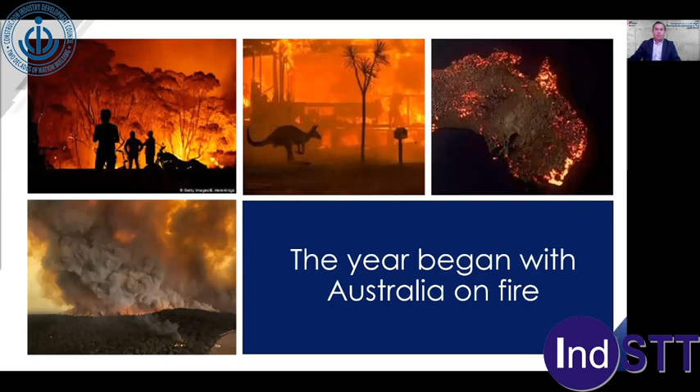We started a very complicated year, 2020, where Australia was on fire, thousands and thousands of land areas on fire. Then the COVID virus began to spread in a fact without precedent in the modern era, one that all of us who are alive have not had to live through before.

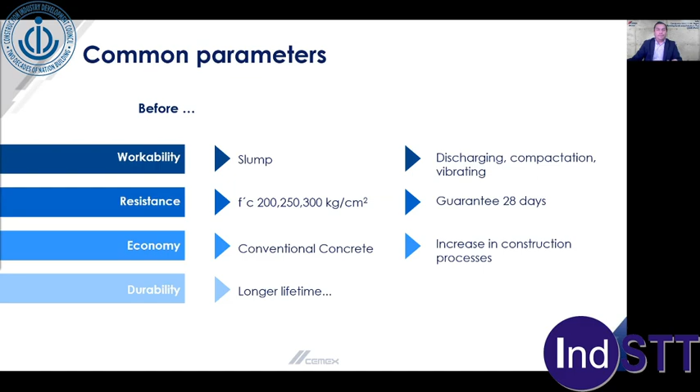Generally, works always take longer than programmed. The projects are different, and in the course of time there are always mishaps not visualized from their specification, resulting in an expense greater than budgeted.

If we think about this transformation and see the opportunities concrete offers us—not necessarily because it is gray, dense, and square, concrete also has the opportunity to be flexible in the face of requirements for reduced personnel, reducing construction times that can translate into shortening weeks of delay, and reducing or eliminating finishing processes accompanied by innovation in processes and materials.

As I mentioned before, the challenges are many, and these must be summarized in three words: security, always taking care of our personnel; efficiency, reaching our objectives despite the challenges; and good support and accompaniment.

For this, I want to reflect on a question. Now that our construction industry has been considered essential, what kind of products do you imagine could help us face this challenge? Well, today we will talk about self-compacting concrete, architectural concrete, ready-mix mortar, and antibacterial concrete.

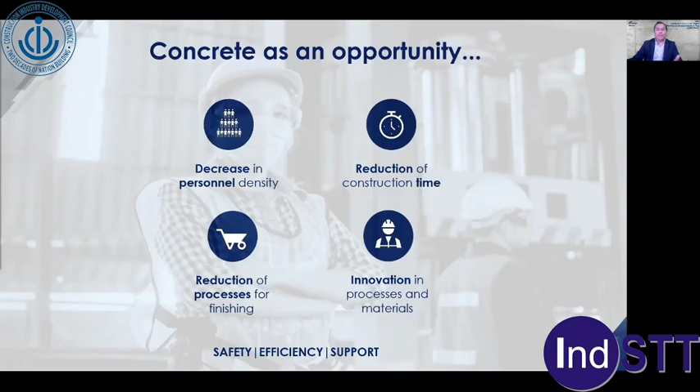These four concrete types will help us revive our industry after COVID-19. With all these opportunities we have mentioned, several options are open to lead the works forward before the challenges mentioned, as concrete, being a construction material with diverse performances, can lead us to execute in an intelligent and concise way, fulfilling the requirements of guidelines.

The first agent promoting transformation in our construction is self-compacting or self-consolidating concrete, which is a highly fluid concrete that allows partial or total replacement of vibration and contributes to making work more efficient in casting, achieving highly aesthetic finishing.

All of this helps it be placed very easily, which leads to reducing personnel dedicated to compaction or consolidation, which in turn reduces equipment needed for this activity, as well as noise and emissions. It also reduces personnel required to spread the concrete, for example in slabs and other horizontal elements, reducing placement time and leaving elements ready—slabs, columns, foundations—while also helping with leveling work and avoiding segregation.

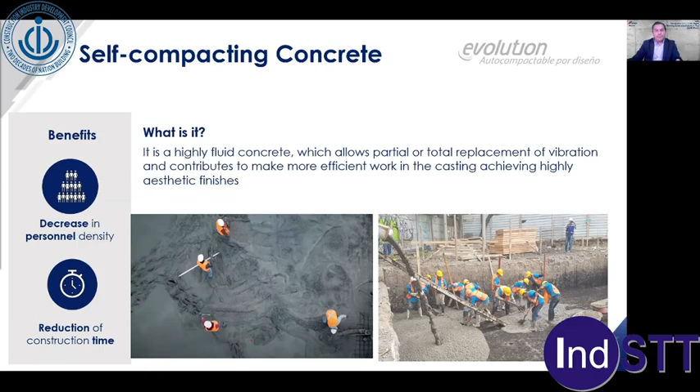All this also translates into a considerable decrease in rework due to bad finishing. How many of you have not assigned a complete crew to punching jobs, repairing recently cast elements? It reduces the casting times, so the time workers need to be on site is reduced.

All factors that self-compacting concrete can contribute translate into a reduction of up to 40% in manual labor. That is to say, a conventional crew formed by 7 workers can be reduced to 4 to deliver the same result on the same element, without even quantifying the benefits and savings in environmental impact.

Our second productivity and transformation promoter is accelerated resistance concrete, which, compared to a normal setting concrete, allows us to obtain fast resistance besides reducing execution time and, above all, putting the work into service in a few hours. It is suitable for construction systems that demand fast finishing and soon construction.

These performance qualities allow us to reduce construction times and increase project productivity, as well as adhere to the work programs which, as mentioned by the architect previously, tend to lag behind the established times. Accelerated resistance concretes allow us to obtain the specified resistance at 28 days in up to 24 hours or less.

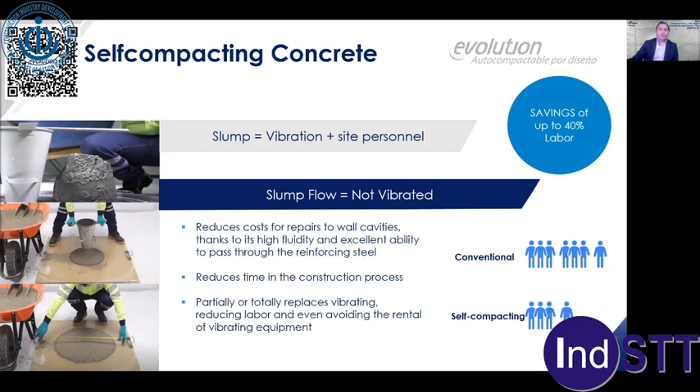Therefore, these concretes allow us to remove the forms or formwork in less time, and perhaps in the same day an element can be cast and de-formed. With all the above mentioned, it allows us to put elements and structures into service, always ensuring compliance with quality and resistance standards, generating savings of up to 70% in construction time.

What benefits does architectural concrete offer us? The main objective of architectural concrete is the reduction in finishing processes, since it is a product that, in addition to complying with structural properties, has the capacity to have the highest aesthetic quality.

This is achieved with a correct mix design by means of integral colors, aggregates, and cement, leaving as a fundamental characteristic the image, the form, and the texture in a single material, the concrete.

Architectural concrete is competitive with other traditional materials. We can get more durability, savings in maintenance cost, and most importantly, a reduction in finishing time of up to 25%.

In the case of using architectural concrete, it is important to mention that we must take certain care before making a cast. Some recommendations are a proper selection of formwork, mold release, and having very clear what type of texture and finishing we want to achieve. Make a mock-up before the official supply in order to assess its appearance and also familiarize with the construction process.

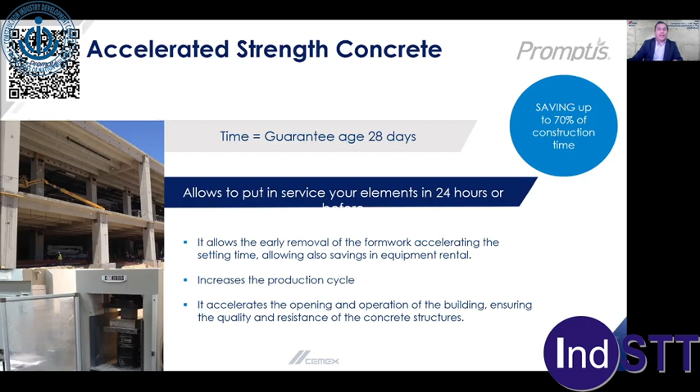Architectural concrete replaces paint, eliminating painting and repairing processes, reducing construction time, since finishing stages are one of the longest construction processes due to the detail in the work. The times and work of aesthetic repairs are smaller, being a product with uniformity in appearance and savings in maintenance cost.

Without requiring additional constructive processes, as is the case of architectural concrete, as a result we get a lower initial investment and the savings that could be generated by using integrated color into a concrete wall. In addition, we add the benefit of maintaining speed of construction, among others.

Stabilized mortar, or ready-mix mortar, maintains workability properties for periods of 4, 5, and 8 hours. The traditional comparison is against mortar made on site. Imagine your project site where the mixer truck arrives and discharges the mortar in a couple of containers, and the builders just have to carry the mortar and start placing it. This makes it clear that you are reducing site personnel and storage space for material on site. It's recommended for masonry works and can be supplied in different resistances and slumps.

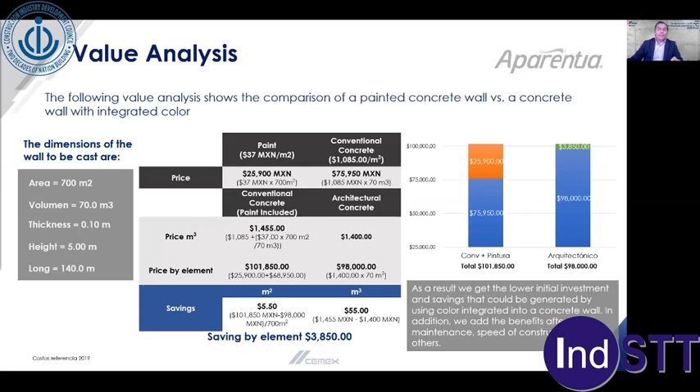We can make any elements we can imagine with this product. So the ready-mix or stabilized mortar competes against mortar made on site. It decreases labor density per element because the product is pre-mixed from the ground up, ready for placement, with no need to add anything on site. It reduces on-site storage costs of material because it's pre-mixed, and reduces rework for repairs caused by quality or performance problems when mortar is made on site.

The last concrete type is self-curing concrete. Self-curing concrete's main function is to promote internal curing, making the hydration of cement more efficient, promoting cohesion, improving workability, and facilitating the finishing of the concrete. Generally we have the normal concrete process, a conventional concrete, and a concrete curing process. Self-curing concrete promotes that internal curing by itself.

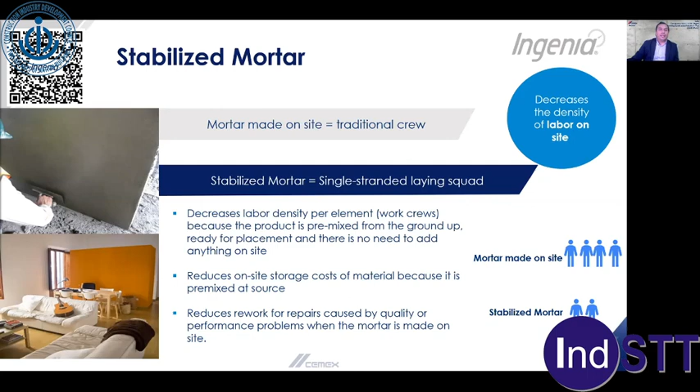Antibacterial concrete has antimicrobial characteristics, which in addition to developing its mechanical properties, can slow and inhibit the growth of bacteria on the surface and inside the concrete elements.

Antibacterial concrete fosters health and sustainability, reducing the need for protective coverings and disinfection processes during or after construction, which reduces time in the construction program. It reduces the disinfection process for more than 10 years for a wide range of bacteria.

As we've said, given the situation construction finds itself in regarding its evolution over time, one of the greatest opportunities is to innovate. Innovation and its incorporation into our projects will ensure we can meet and overcome the challenges we all face today. It's necessary to enter the digital world, which will allow us to be more efficient and increase productivity. We should make use of tools that connect us with our customers, suppliers, and our own equipment—tools that facilitate information management and help us make better decisions, like placing orders online with a click.

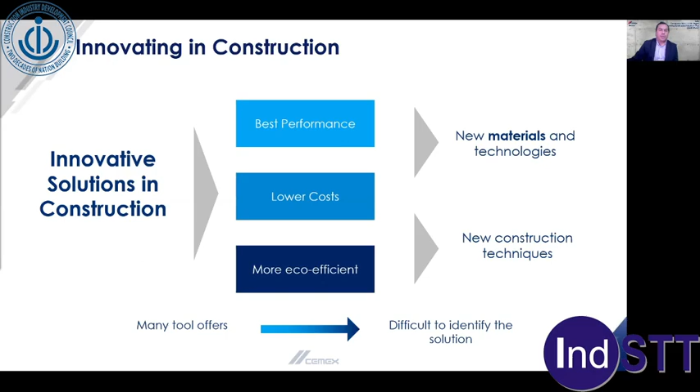Construction has the advantage of learning from other industries that have gone through similar digital transformation processes in the last 5 years. Experience shows that companies fastest to assimilate emerging technologies and develop new platforms are the first to move and gain a strong competitive advantage. We expect construction to follow a similar pattern, presenting all industry participants with the imperative of launching an immediate transformation. Technological stagnation in construction has led to low productivity and failure to incorporate digital technology in our projects.

However, it's time to start using tools that lead us to innovate in construction, not only in materials but also in project site management. For example, if airports have implemented artificial intelligence to detect suspicious cases or positive COVID cases, why not use the same technologies at health checkpoints on our project sites?

Using big data to monitor worker efficiency and detect possible infections, or having sensors and telemetry to monitor proper implementation of prevention protocols. And also begin to visualize construction processes that, hand in hand with materials, take us to another level of construction.

Robots to automate the placement and assembly of steel, the placement of block partitions, concrete launched with shotcrete via drones, modular prefabricated precast structures not only to assemble buildings—as seen in hospital construction during this pandemic—3D printing of concrete houses and buildings, use of BIM 7D, and technologies that incorporate prevention measures from the design stage for the execution of works.

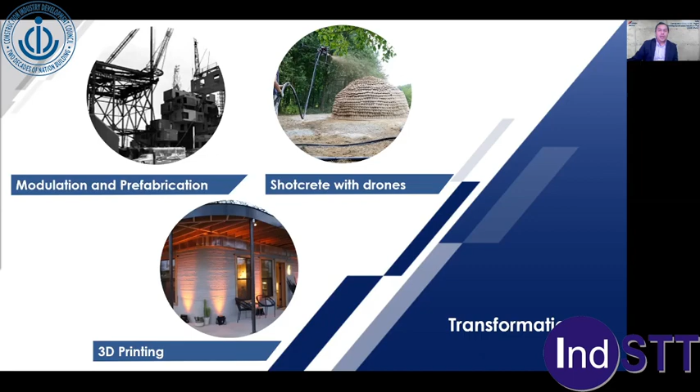Think about what we can achieve if we change the way we see concrete. Think of concrete as an opportunity. In summary, it can clearly help us reduce work personnel.

And to mention an example, it can be applied to the fluidity or stabilization characteristic of a product. We can think about accelerating the resistance even in hours and not wait for a period of 28 days. The reality is that almost 80 days of confinement have shown us that the future and innovation is now.

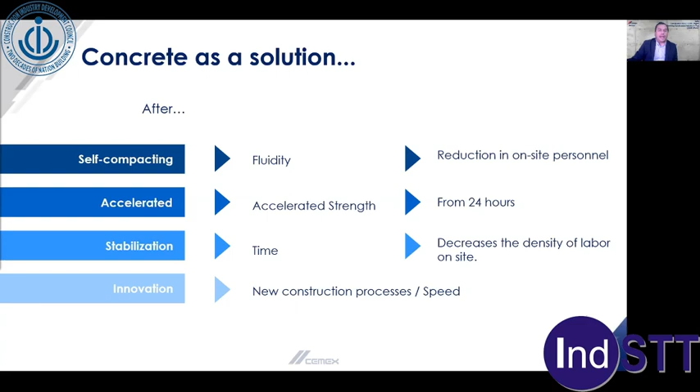So I'm going to close my presentation with a quote: every crisis has a solution, an expiration date, and a learning. Thank you so much, and I'm ready if you have any questions. Thank you so much for your attention.

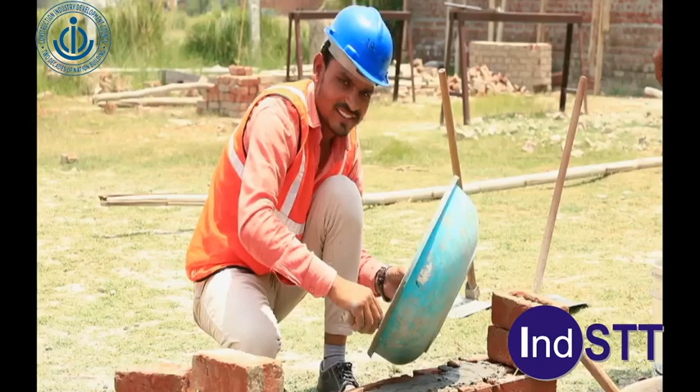Up above the world so high and down on the ground, the advancements that you see in India's aviation is the success saga of the excellence shown by Airports Authority of India. AAI is constructing, operating and maintaining world-class airports. Along with that, AAI has a side that's down to earth and close to the people.

One that's clearly visible in its CSR programs and activities. Through its CSR activities, AAI has keenly focused on skill development. To generate livelihood opportunities in backward and remote areas, AAI has tied up with the Construction Industry Development Council for skill development of unemployed youth and people belonging to economically weaker sections. In the construction industry, there is a huge shortage of skilled manpower, and at the same time there is unemployed youth, so if we provide them a skill, it will be a win-win situation for both. Through this skill development training, students get theoretical and practical knowledge in construction-related subjects like land survey, electrical wireman, general work supervisor, site accountant and storekeeper, etc.

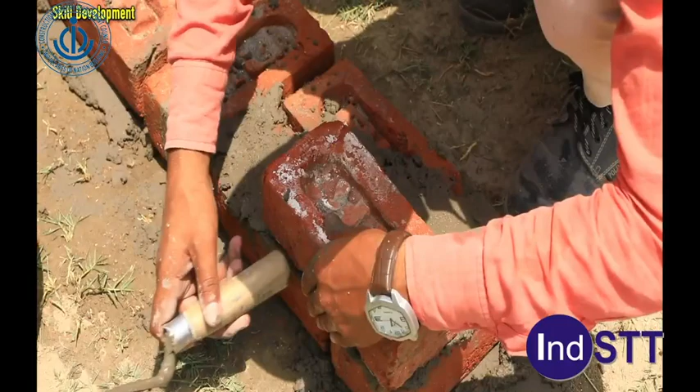Actually, here we are providing training to the unskilled youth of India who are unemployed. We distribute pamphlets at different locations in UP, Bihar, and West Bengal to find unskilled manpower, and then we make them skilled. We provide them 3 months of training. More than 5,000 students have been trained through this skill development program since 2015.

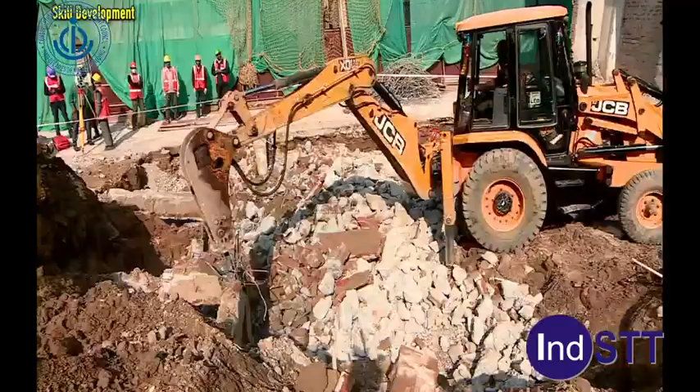AAI has generated employment for many underprivileged and uneducated youth. And on the other side, AAI and other PSUs got skilled workers for their construction sites.

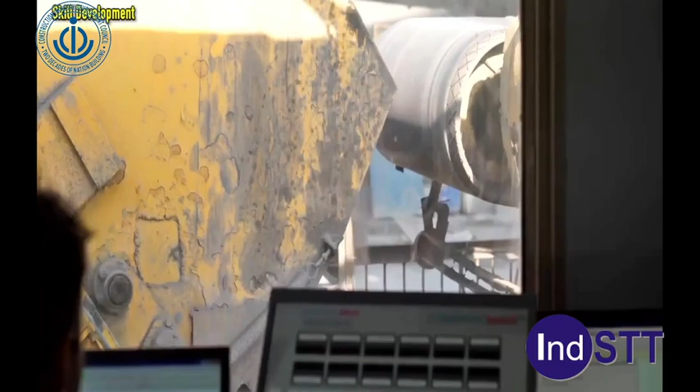Wherever you are, my name is Pedro Castro Borges.

It's a pleasure for me to participate in this online international conference on reviving the construction industry in a post-COVID world, and India Construction Week, of course. I'm going to talk with you about the social appropriation and application of corrosion and concrete knowledge in the face of pandemics and natural disasters.

Now, we are living through a very singular situation around the world, which is the pandemic. However, there are many things that are linked with the situation of poor people. We need to fight against that. We have been doing that for many years, but we have not had complete success. The idea of this presentation is to show you some of the things we have been doing in our place in Yucatan to help people achieve social appropriation of knowledge.

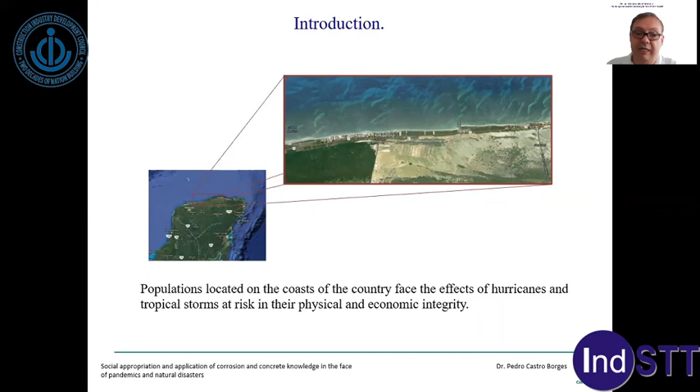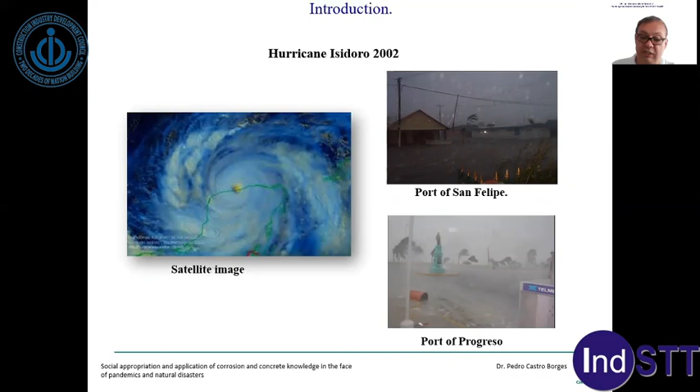The Palafite, the stilt house, the first model, the first prototype, was constructed just before the passage of Isidoro. And these are some examples of the floods in Mexico, recent floods in Yucatan and Tabasco.

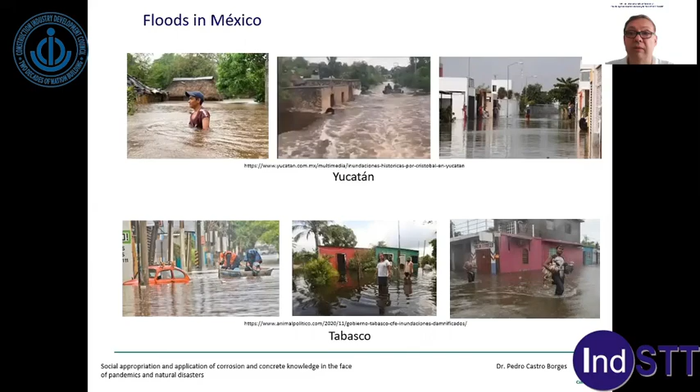If by that time the government had a strategy to construct stilt houses everywhere to minimize the economic, physical, and human impact of the floods, we could have fewer problems than now, at this moment where all the southeast of Mexico is affected by floods. Here are other recent images of the disasters.

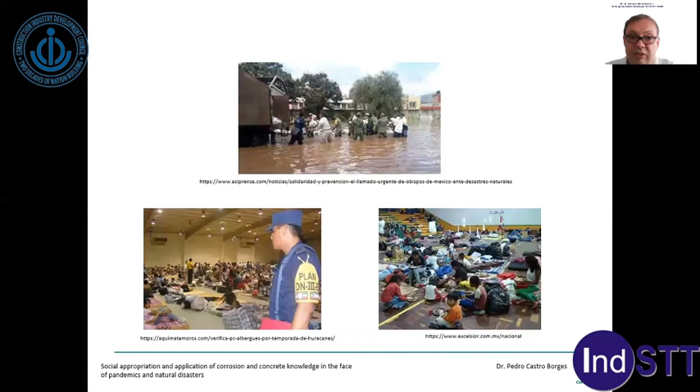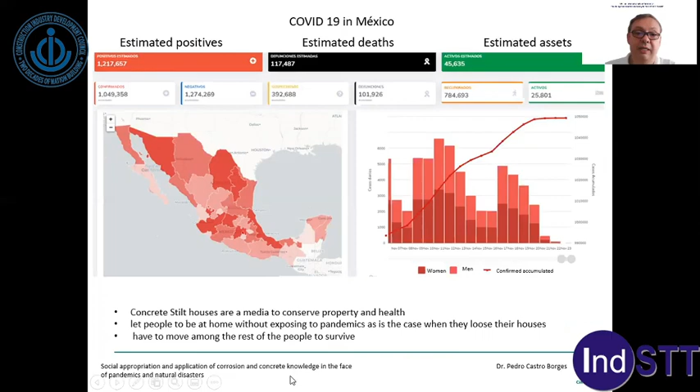And here we have the estimated data of COVID-19 in Mexico, now by November 25, 2020. Fortunately, we have the vaccines coming, but the problem here in the Southeast is terrible now.

But what was the origin of the Palafites or the stilt project? In 2002, it emerged as an idea from Cinvestav in Mérida, in conjunction with the population. The idea was to use a rural housing model, but to prepare and develop this housing model with the people, with durability and sustainability criteria, and try to adapt it to stilt housing.

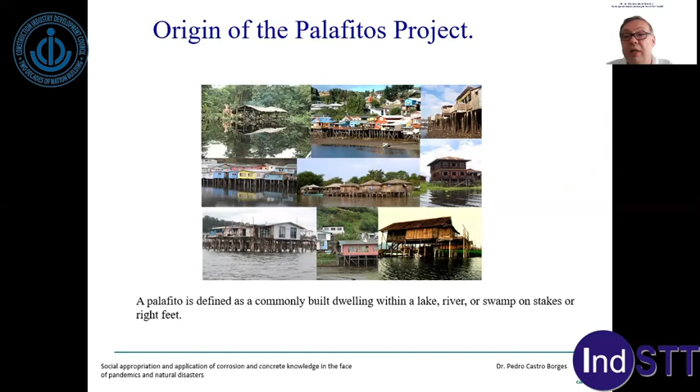These are some photographs from stilt houses in many parts of the world. A palafito is defined as a dwelling commonly built within a lake, river, or swamp on stakes or right feet. This is the first palafito, built after the passage of Hurricane Isidoro in the village of San Crisanto.

With this in mind, part of the objectives of this talk was to show you the experience of training people from developing communities to appropriate knowledge related to corrosion and concrete, even in the presence of poverty and illiteracy.

The second objective, which was very important, was to detect and record the influence of microclimates on the corrosion process of the palafito substructure, based on orientation, height, positioning of the rebar, internal temperature, and humidity of the concrete.

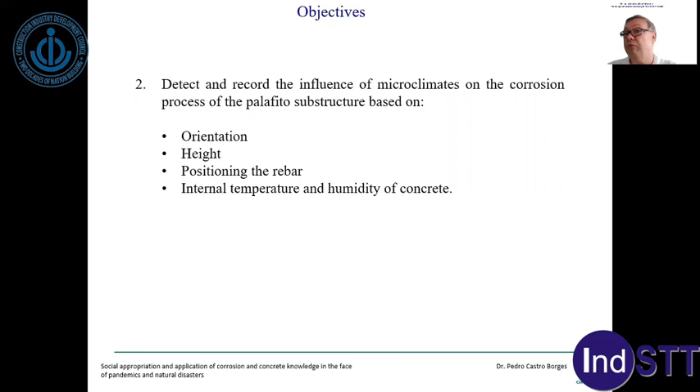I'm going to show you some of the results that were obtained with the help of the community. They were able to empirically know when their house was in danger or not, in terms of corrosion or durability. Here are the palafitos, the first models: the first with galvanized steel inside concrete, the second with black steel.

The models are quite different. Palafito 3 uses conventional steel and concrete, and from the fourth one onward we have the prefabricated option, which let us decrease the cost. Of course, the participation of the people was mainly on the roof and some other parts of the structure within the construction.

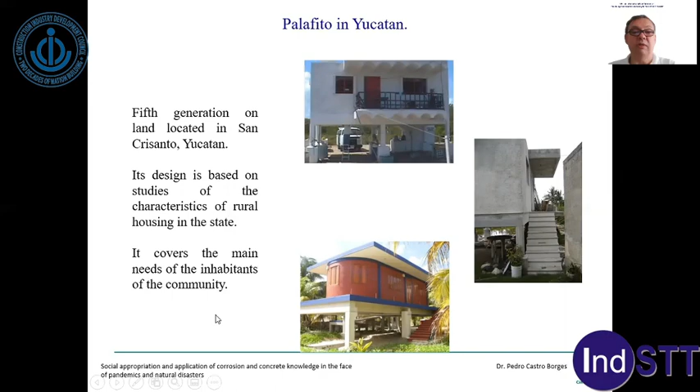The palafito's design was based on the characteristics of rural housing in the state, as you can see in this specific one, and it covers the main needs of the inhabitants of the community.

In the methodology, a basic description of this design was the reinforced concrete substructure, which was the base for our study on durability, because the substructure sustained the structure and was confronted with the tides, high tides, floods, and now with the pandemic situation.

So the families could stay at their home, safe, without risks, with their properties, their human lives, and protected from the pandemic. The elements that make it up were prefabricated, and the design included moisture chambers.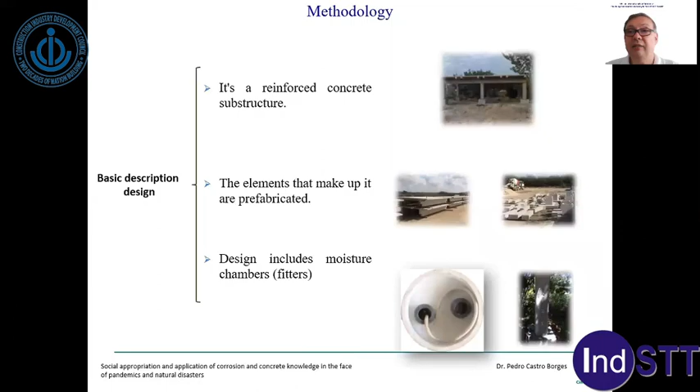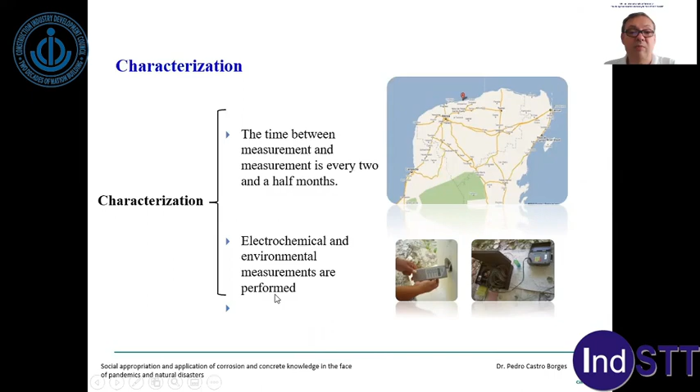These moisture chambers were designed to obtain temperature and relative humidity data, as well as electrochemical data. In the characterizations, we tried to measure every 2.5 or 3 months, using electrochemical and environmental measurements, in several study areas in the columns and beams.

In these columns and beams, we selected 3 positions and obtained results from them and also from the rows. We have several nomenclatures. We are going to talk in this conference about some specific contributions of this study.

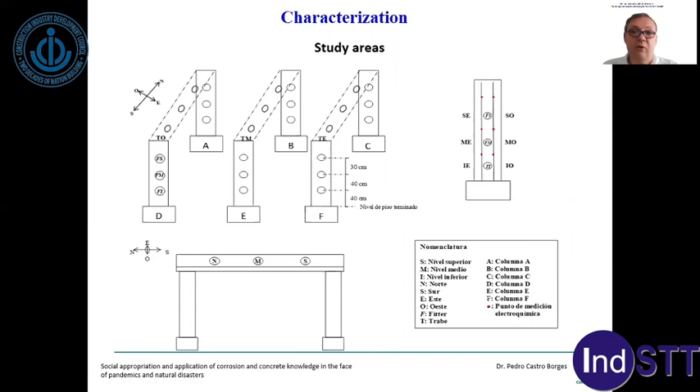These were the measurements, the apparatus used to measure temperature and relative humidity. And this is the commercial corrosimeter, the GECOR6, used to measure with the chambers and with the help of the community, to obtain values of resistivity, corrosion rate, corrosion potential, and so on.

Now we have the results. I'm going to show you the result carefully. This is the only slide of results, and then we are going to go to the discussion.

I'm going to show you only the corrosion rate values. These corrosion rate values are in accordance with the others: humidity, temperature, corrosion potential, resistivity, and so on.

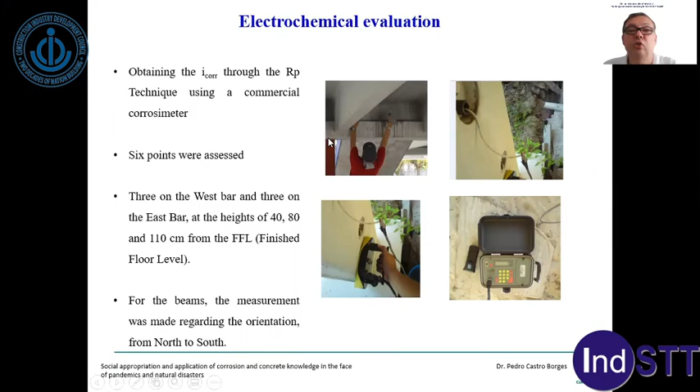There are 3 important things here on the corrosion rate that I'd like to show you. The first one is to note that there is a mixture of all the variables, so it is impossible to know the contribution of each of them if we are talking about the orientation, because the orientation gives us the possibility to change some design variables on the palafite, making it more accessible, more economic, and more durable to the community. So that was very important to us.

The second thing to observe here is that all the tendencies are flat. And that was very important, because the third thing was to note the dotted lines, specifically the red dotted line, which means the threshold between the passivated and the depassivated zones. In this case, all of the values were below the depassivation zone.

So we were not at risk of having corrosion, and the behavior of the structure was as we were expecting. That made us feel very happy, very, very happy until now. So the durability design was working. So what is the problem now?

To have the contributions - it is not possible with this representation, so we had to change. Now we are going to discuss the results in terms of the cumulative corrosion rate, which is going to show you the influence of orientation, the main parameter we are going to analyze today. The corrosion rates are in microamperes per square centimeter per month.

Let's observe here. We are going to analyze the heights in columns: the top, the average, and the lower height. The top height at 110 centimeters from the baseline, the average height at 80 centimeters from the baseline, and the lower height at 40 centimeters from the baseline.

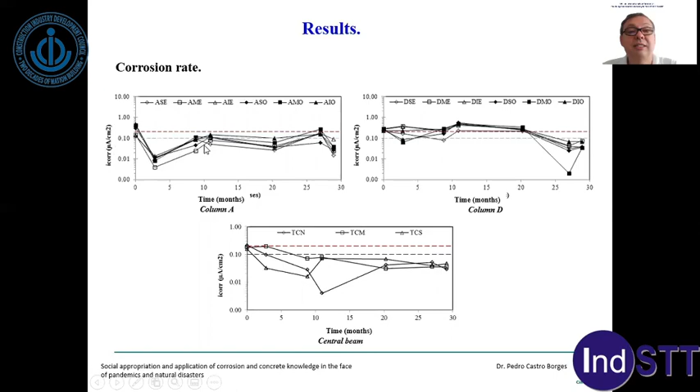We have on the south the marsh, and the marsh is producing a constant humidity, and for this reason the time of wetness is higher than on the north side where we have the sea. Where we have the sea, we have tides, we have north winds, but we have very specific cycles of wetting and drying, and that is the reason why the time of wetness is less than on the south face.

We are able to observe that very clearly on the columns of a house, with the help of the community. The community knows what this means, and they are learning how to protect their palafites.

If now we see the influence of the orientation in beams, we can see a similar trend. The difference here is that the south zone is below. We have no clear explanation for this, but we suspect that it's because most of them, or all of the beams, are protected, covered from the environment.

So apparently, the influence of the environment is almost the same at any location. That's the reason why we are observing very small cumulative corrosion rates, and it's not easy to find differences between the north, the central, and the south zone.

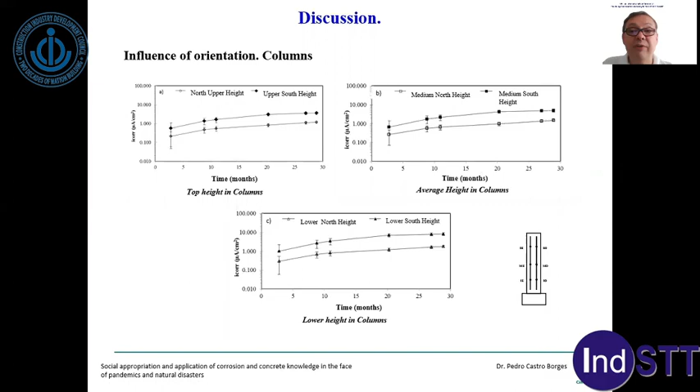It's not so different, but it's clear that the east part has less influence from time of wetness. That was very amazing for us, because now we know how to protect the north, the south, the east, the west, and also how to play with the dosage of the mixture, the position, the concrete cover, the kind of cover, the kind of concrete, and then try to minimize cost with the same durability of the project.

If we now look at the south zone, remember the south zone is in front of the marsh and has more time of wetness. We can observe the same difference. Look at that, the east part is always below, always below. It's not completely clear, but we are feeling that. So the treatment could be the same as in the north. The only difference is that in the south we have more time of wetness and more cumulative corrosion rate, but the tendencies are the same.

As conclusions: in terms of microclimates, they were recorded and they modified electrochemical activity based on the orientation, height, and position of the rebar. In terms of orientation, the southern part of the palafite or stilt house is more electrochemically active than the northern zone, and bars located in the west part of the columns are more electrochemically active than the east side bars. Other conclusions: the elements with the greatest electrochemical activity have been the columns, also above the beams. The lower height of the columns is more active than expected, more than the upper and medium heights, because of the accumulation of humidity.

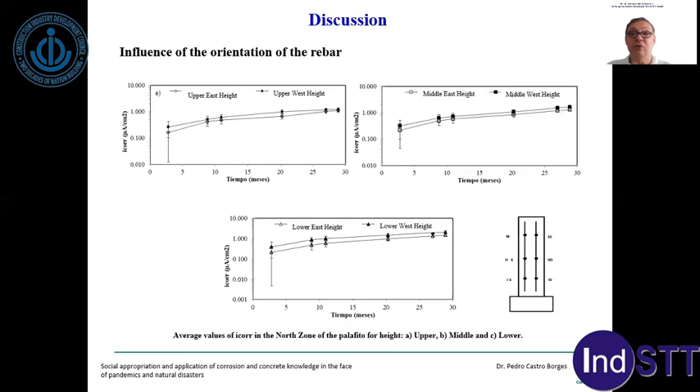It was also verified that in addition to microclimates, there were constructive details related to the placement of steel and minor repairs in the compression layer that possibly allow moisture filtration and influence the expected electrochemical process. However, we were able to observe differences in the mixture of variables, but not in the tendencies. The tendencies were the same, and they always behave in the zone of passivation.

With this in mind, I would like to say thanks for your attention.

It is important for us to keep in mind that the knowledge generated must reach the poor people, the unprotected people, those who do not have the same possibilities as us. To reach this, we need to have contact with them, to teach them empirically. Now we know we have methods to do that. The participative research method is an excellent tool to reach it, because through it poor people without knowledge could empirically gain knowledge and know how to apply it on site, in their communities. Thank you very much.

I apologize for my bad English, but I hope to have given a presentation that you could understand and that you can share and spread into your communities. Thank you very much.

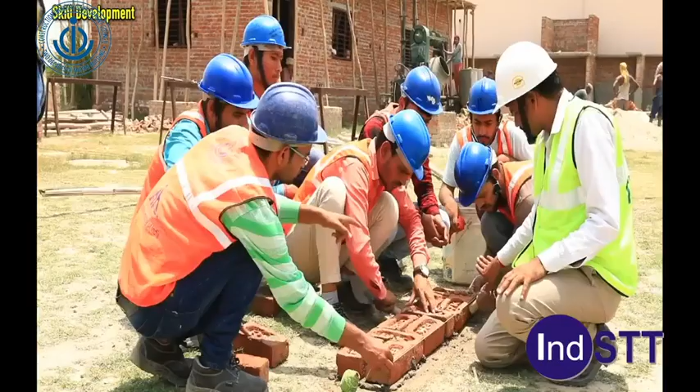Here we are providing training to unskilled, unemployed youth of India. We distribute pamphlets at different locations in UP, Bihar, and West Bengal to find unskilled manpower, and then we make them skilled by providing three months of training. More than 5,000 students have been trained through this skill development training program since 2015.

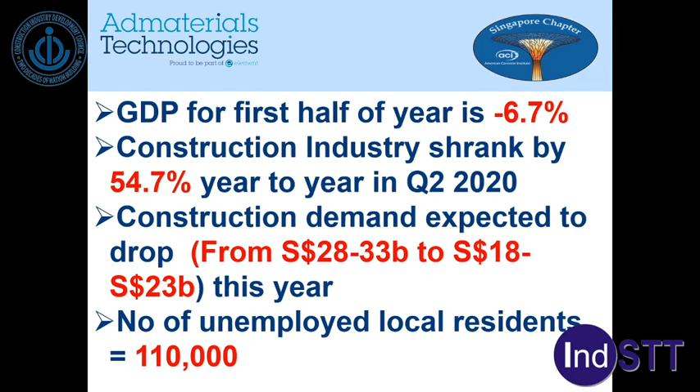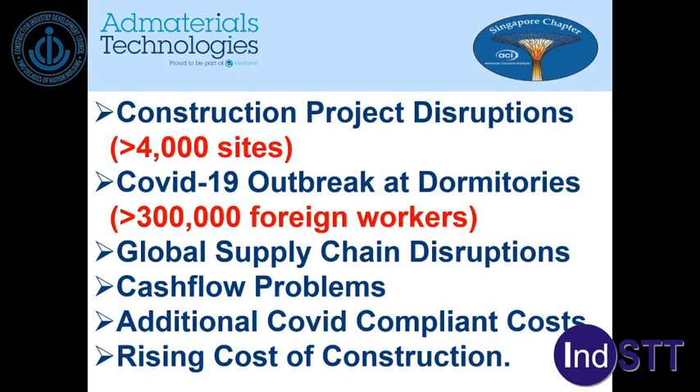But fortunately, the Singapore government gave the industry strong support. For example, they gave manpower cost support through a job support scheme from January 2020 to March 2021. The company will receive 75% to 35% salary subsidy from the government, but only for local employees.

For foreign workers, the levy was also waived 100% to 25% from June 2020 to December 2020. So foreign worker levy rebates of $750 to $90 per month were given from June 2020 to December 2020.

For business cost support, you can defer income tax payment. You will also receive a property tax rebate. You can waive rental and defer increases in government fees and charges.

Under the enhanced bank loan scheme, you can now get a so-called COVID-19 loan from the bank quite easily. The government also pays some compliance cost support - for example, for workers' swab tests, the government will pay the full cost until early next year.

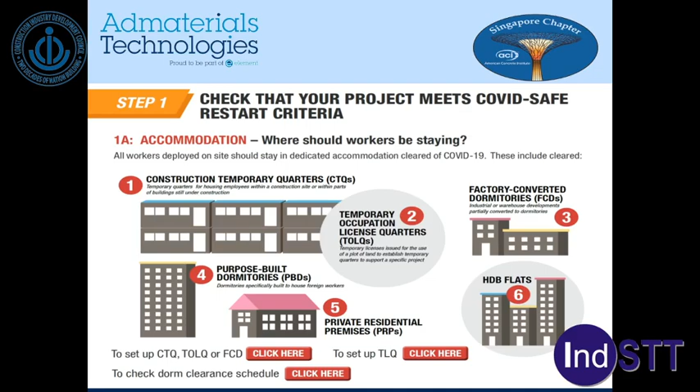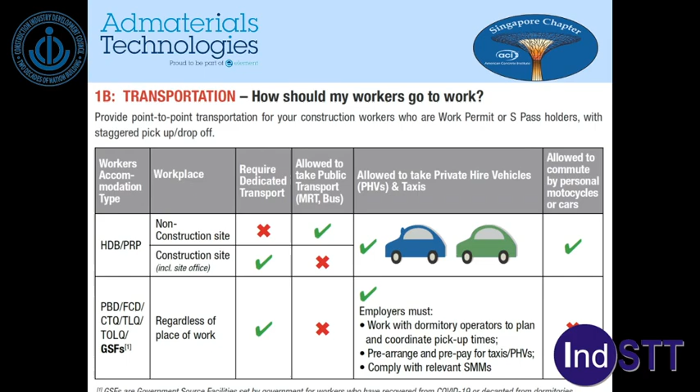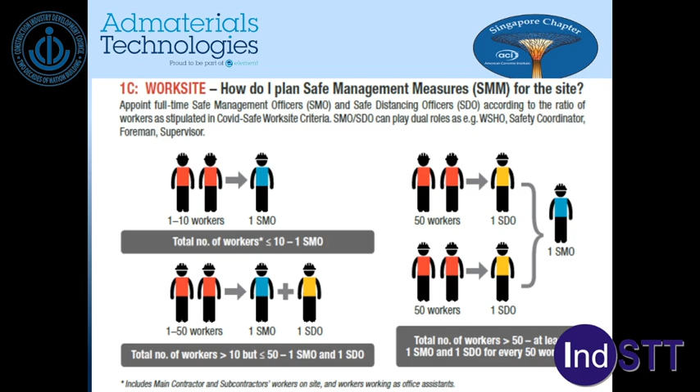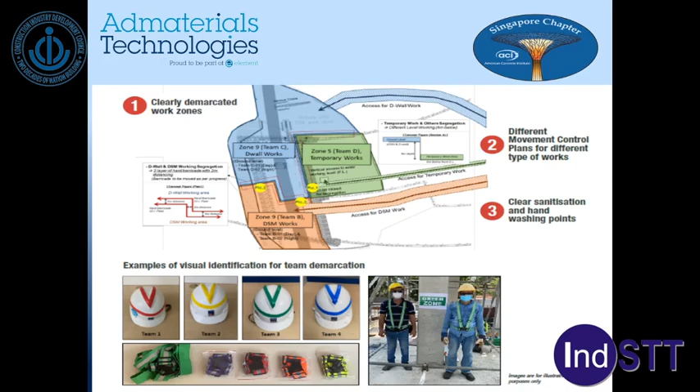For the construction site, you also have to clearly demarcate work zones. Workers cannot mingle or go from this zone to other zones. Different movement control plans apply for different types of work, so you cannot mix them together. You have to set clear sanitization and hand washing points for all workers. Workers have different helmets or clothes so you can distinguish each other.

For the workers, they have to download 3 apps: one is Trace Together, second is SG Work Pass, third is Foreign Worker MOM Care. You have to check whether the apps are in green color. Only if green, they are allowed to enter the construction site.

You also have to educate your workers on COVID safe practice. You have to arrange work for the accommodation, and if there's any updating, you have to inform MOM.

After that, you go to step 2: apply to BCA for Let's Start Work. This you can apply online, so very simple, very easy, right? The owner has to submit the application before work can start.

After obtaining BCA approval to start work, what should you do? You have to book a swab test for your workers. This swab test has to be done not just one time, but every 2 weeks. You have to send your workers for testing.

Workers also cannot rest on the same day. They have to stagger their rest day, meaning not all workers can rest on Sunday. They have to distribute rest across weekdays: Monday, Tuesday, Wednesday, and so on.

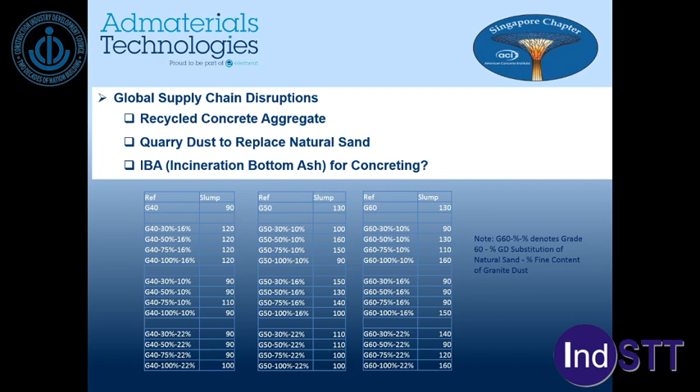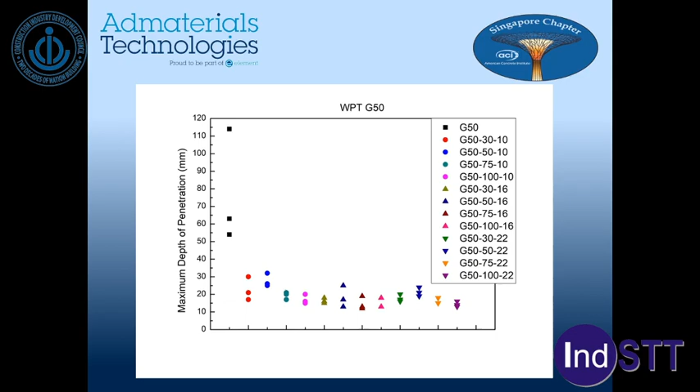Even for water permeability, for example this grade 50 concrete, granite dust concrete is actually better than natural sand concrete. This is also true for carbonation depth, where granite dust concrete performs better than natural sand concrete.

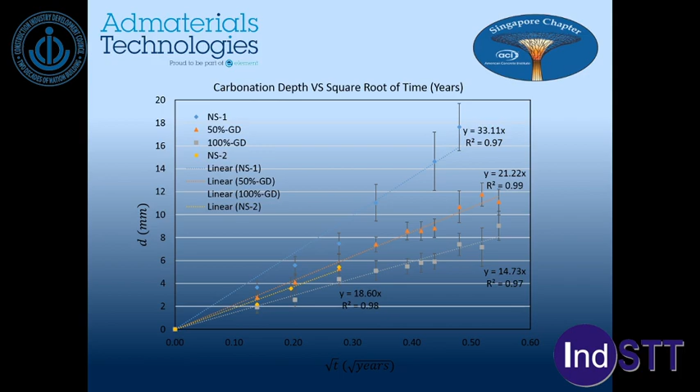This is part of our research results. I just want to share this with all of you.

So the next one is digitalization: artificial intelligence for ready-mix concrete. This AI checks all movement of raw materials and products—the arrival of imported raw materials in Singapore, transportation of these ingredients to silos, from silos to the plant where concrete is made, and transportation of concrete to the work site. All of this can be traced, optimizing the use of plants, trucks, manpower, and raw materials via collecting data and handling orders. Using this system, we can save at least 45% manpower.

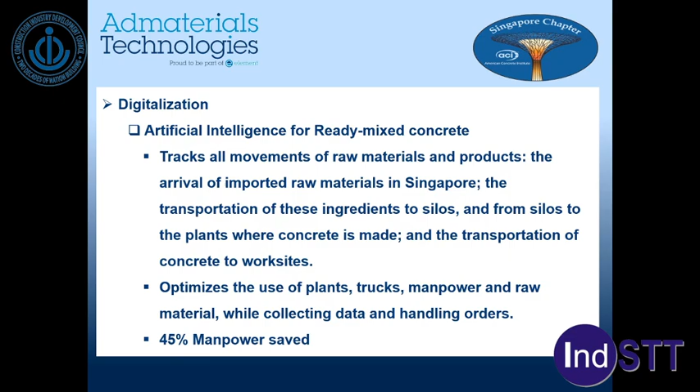Again, this is one of our leading ready-mix concrete suppliers, Pan United Concrete. They have already implemented this AI system and even signed an MOU with a South Korean company to help them set it up.

That's another innovation in concrete technology: a smart concrete mixing system that controls concrete consistency even as mixer trucks move from the batching plant to the project site, enabling fixes to the concrete mix to be made remotely. This reportedly improves consistency of product quality, doing away with the need for quality assessors and product technicians to test each truck's output while on site.

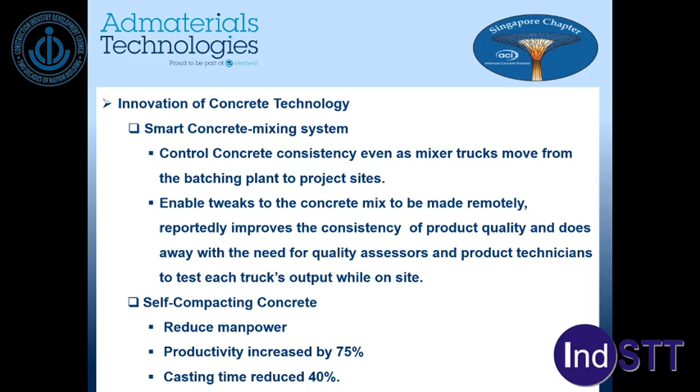Another innovation is self-compacting concrete, which can reduce manpower, increase productivity by 75%, and reduce casting time by 40%. This is one of the papers, again from Pan United. You can see that by using innovation and high technology, you can actually save manpower and save costs.

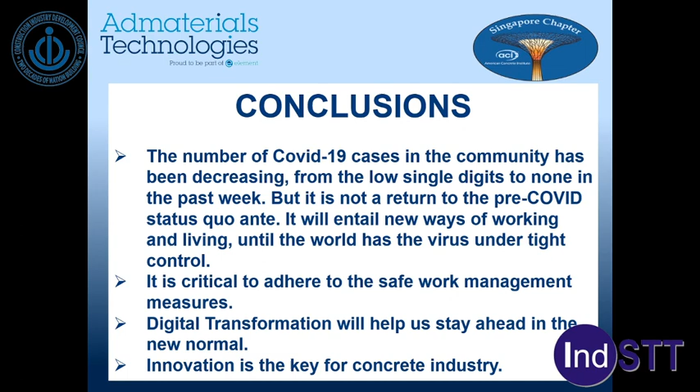In conclusion, the number of COVID-19 cases in the community in Singapore has decreased from low single digits to none in the past weeks. But this is not a return to the pre-COVID status quo. It will entail new ways of working and living until the world has the virus under tight control. It is critical to adhere to safe work management measures, so digital transformation will help us stay ahead in the new normal. I am Engineer Tyson Wong from the Costa Rican Institute of Cement and Concrete.

I am the General Coordinator of the Institute. First of all, I would like to thank the organizing committee for inviting me to this prestigious international conference. I would like to welcome everyone to this brief talk about accessible, sustainable construction in tropical areas after COVID-19.

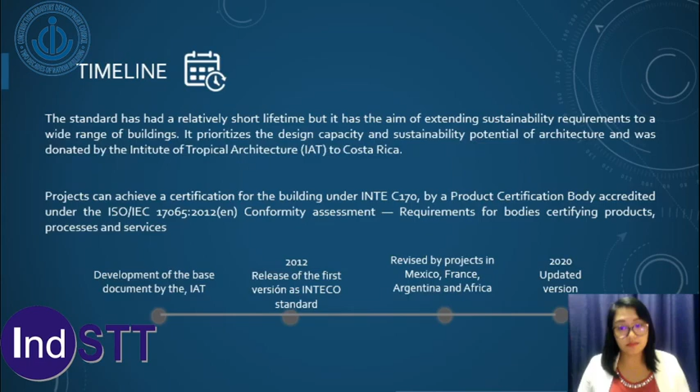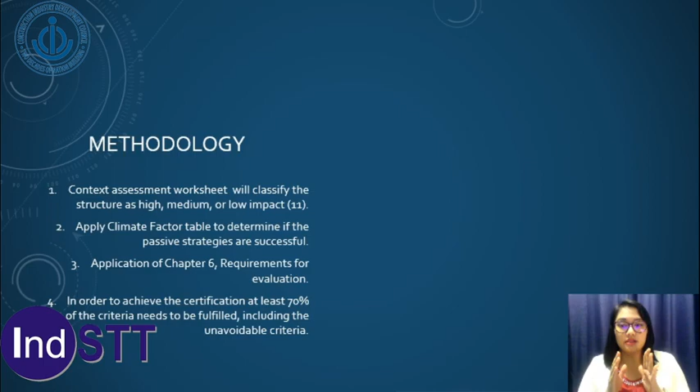Let's get into the methodology of the standard. The first big filter is the classification of what type of project you have, whether it's a social housing project or not. If it's a social housing project, you don't need a context assessment, but if it's not, then you do.

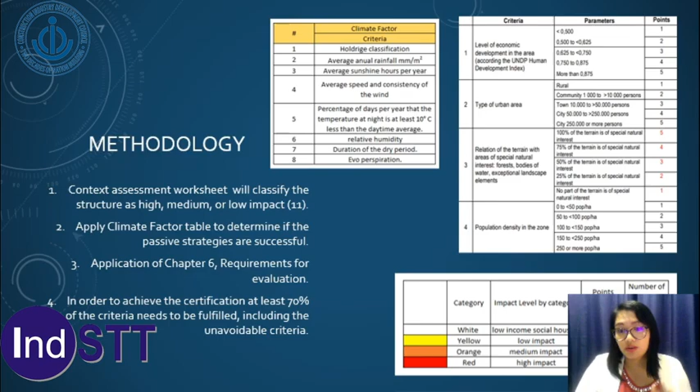The backbone of this standard is chapter 6, evaluation of the requirements. I'm going to very briefly explain each one to you. The first section is spatial quality and well-being, mostly about the relationship between people and the environment: how are they interacting, what kind of distribution do you have, does it have natural wind circulation or natural lighting, does it have areas to minimize climate effect indoor and outdoor, does it use shadows for cooling the spaces for comfortable temperatures without air conditioning in some cases.

The second section is the environment and transportation. Mostly this is about the surroundings of your project and how users go in and out of it. The first thing you need to know is if the site of the project is adequate, according to city planning, and avoids areas that flood or are exposed to other disasters.

In the third section, we have social and economical aspects. In general, the objective is to give everyone access to fair financial mechanisms for contracts. It can be for buying food, local purchasing of materials, respect of social securities, respect of minimum wages. In this section you also need to calculate the investment you've put into the environmental aspects of your project, and how much money you've gained from the environmental benefits of these aspects.

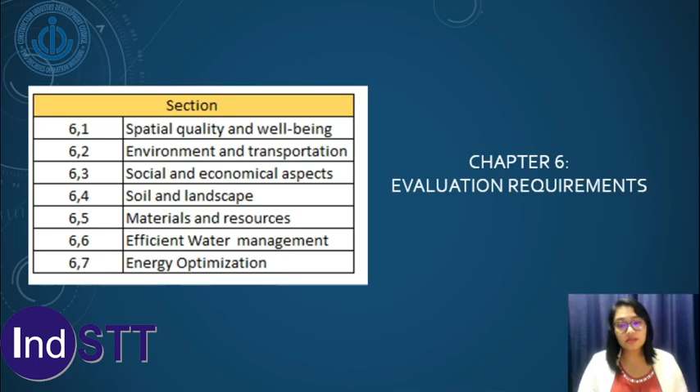In the fifth section of materials and resources, the sixth is efficient water management, and the seventh is energy optimization. What is encouraged is local purchasing, the promotion of modular building and easy disassembling, construction methods that minimize waste, and strategies that reduce resource use, such as rainfall capture for irrigation or other uses, the use of biogas, artificial illumination designed around natural lighting, and minimizing equipment and electrical usage.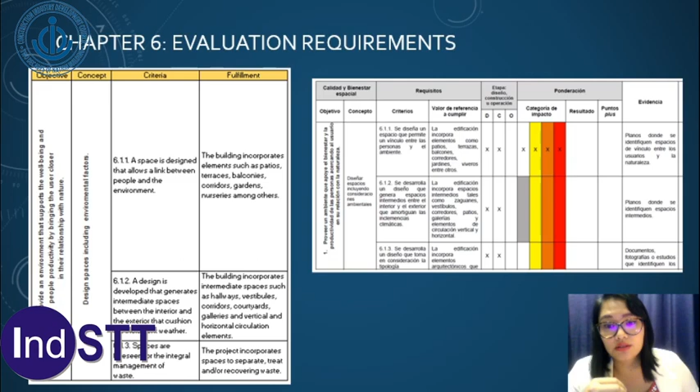In this section, you can see on the right hand side the actual standard, so you just have an idea. It's in Spanish, I'm sorry, we haven't had time to translate it yet. On the left hand side of your slide, you can see a small part of it translated to English, so you can have an idea how it looks.

In Annex 1, there is a carbon footprint inventory mentioned, which was developed by the institute where I am the general coordinator. It's an easy tool to have an inventory of the carbon footprint in your project.

The takeaway I want you to have from this brief talk is that we cannot return to normal. We have to reassess the interactions that we have with the environment. Costa Rica and India are quite susceptible to climate change and are in need of resilient and sustainable structures with smaller budgets. Since by 2050 the UN has issued statistics that the majority of the human population will live in tropical areas, where a third will be children, we require affordable housing and cities that have the three main aspects of sustainability: economically, socially, and environmentally friendly.

As I told you before, you don't require the certification. You can buy the standard and just use it as a guideline for your project, and easily take advantage of all these criteria and ideas to perform and make your project more sustainable.

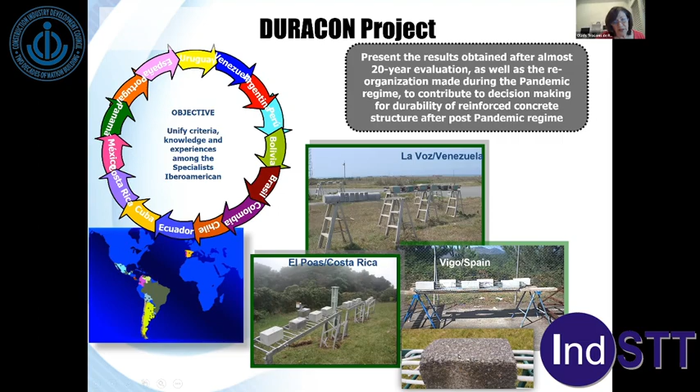This research has been running in 9 Ibero-American countries: Bolivia, Chile, Colombia, Costa Rica, Mexico, Spain, Portugal, Uruguay, and Venezuela. The following figure shows all the test stations selected in the 9 participating countries.

37 monitoring stations were installed: 24 in urban environments and 13 in marine environments.

Evaluation of the climatic and environmental parameters at each exposure site during the test period was based on the methodology established by ISO standard 9223 for classifying atmospheric aggressiveness. This standard classifies the atmosphere according to time of wetness and the deposition rate of atmospheric pollutants: sulfur compounds (P) and salinity (S). The figure attempts to show the expected relative aggressiveness at the different test sites analyzed.

However, considering that unlike carbon dioxide and chloride ions, the sulfur dioxide contained in the atmosphere does not significantly affect reinforcement corrosion, CO2 instead of SO2 content is plotted on the y-axis in this figure, showing results from all the test sites analyzed in this paper for the first year of evaluation.

Notice the wide range of environments, from moderate to very high corrosivity, not only in marine environments, where chloride ion content in the atmosphere is one of the most important factors to consider, but also in urban and rural environments, where CO2 content is one of the important factors causing carbonation of concrete and therefore corrosion of the steel reinforcement. It is important to highlight that to date, no regulation has been defined to characterize the exposure environment for reinforced concrete structures.

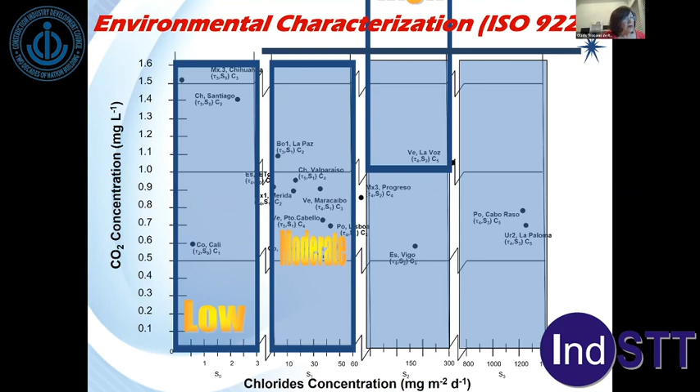But something important is that if you have the same materials to prepare the concrete - for example, Portugal had two mixtures made with the same material but different compressive resistance and different quality - you can find a good relationship between compressive resistance and water absorption, but this doesn't happen for all countries. The same behavior is observed for water-cement ratio 0.45.

What does this data demonstrate? That the quality of concrete for a specific environment should not be assessed only on the basis of compressive strength, but other variables also have to be reviewed, such as capillary absorption and effective porosity, among the most important ones.

The evaluation of half-cell potential, corrosion potential, and corrosion rate were determined monthly using the reinforced beams. The corrosion rate was measured by the linear polarization resistance technique using the GECOR 6. The electrochemical evaluation was carried out on both phases: the prevailing wind phase and the opposite phase.

To facilitate discussion of the results, stations in marine environments will be evaluated separately from those located in rural and urban environments. Due to the time available, I will just analyze the mixture with water-cement ratio 0.65. In the present work, data from more than 3 years of evaluation will be shown. First, let me show the station where the rebars are most active.

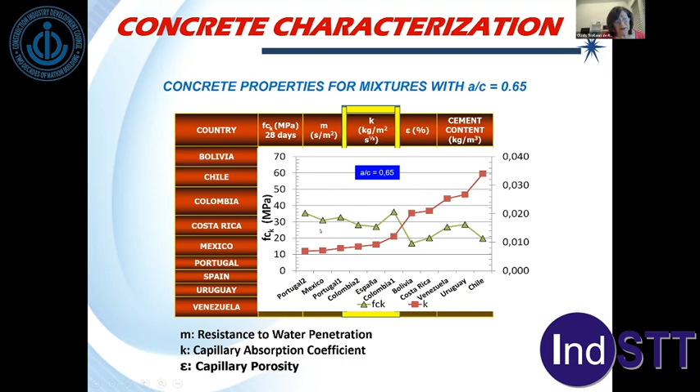La Voz was second in aggressiveness, showing activity after 19 months of exposure. This result matched the prediction based on the analysis of risk and probability of rebar corrosion we did after the first year of exposure. As you can observe, the quality of the concrete prepared in Venezuela was lower quality compared to the concrete prepared in Cabo Raso.

But look at the chloride content in the atmosphere: in Cabo Raso it is 3 times higher than in La Voz. This is the reason why in this station rebar activated at 11 months while in Venezuela it was at 19 months. The table shows a summary of data taken from Cabo Raso and La Voz.

The free chloride concentration threshold for rebar depassivation can be seen, as well as the time for rebar activation. It is important to notice that the chloride concentration threshold for rebar depassivation at a depth of 15 millimeters was lower in La Voz than in Cabo Raso, 0.4 versus 0.89.

Also, the chloride diffusion coefficient was 3-fold higher. This might be due to the lower quality concrete used in La Voz, the higher average temperature, 29.3 versus 17 degrees C in Cabo Raso, and higher wetting time. La Voz has 0.67 and Cabo Raso 0.46. Those variables increase the diffusion rate of chloride ions.

La Paloma, located in Uruguay, is another non-tropical marine environment test station where rebar showed corrosion activity. This was installed after Cabo Raso and La Voz. Although this location has a concrete mixture similar to Venezuela, as shown in the table.

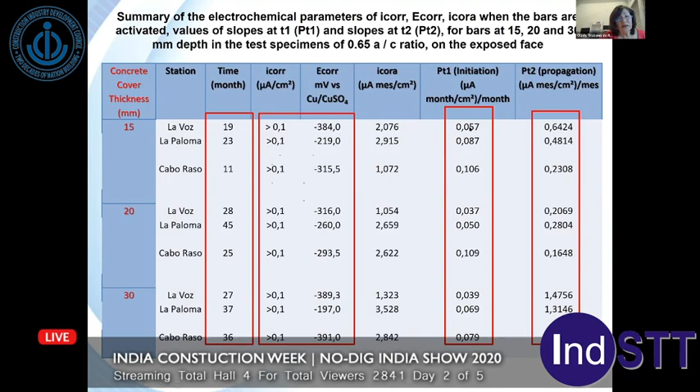1.4 milligram per liter of CO2 with 61.2% relative humidity, and concrete properties of 0.0341 kilogram per square meter per second to a half of water absorption, suggesting it is the fastest carbonation area in the test sites analyzed so far, as shown in this table.

Nonetheless, once the concrete is carbonated, a relative humidity bigger than 80% should be present for active reinforcement corrosion to happen. So the time of wetness fraction, which is the time the rebar will remain wet during 1 year, may be as low as 13%, which would indicate that even though it is the most easily carbonated concrete, the environment does not have enough moisture to initially induce and maintain the reinforcement corrosion.

We found that the most potentially aggressive combination, which may cause higher corrosion rate on carbonated concrete, is expected to occur in Maracaibo, Venezuela test station.

Note the effect of carbonation on these two particular test sites.

As I said before, Maracaibo station shows the highest temperature and therefore corresponds with the greatest depth of carbonation. High temperature may reduce the moisture inside the concrete, favoring the entry of CO2, in contradiction to what's observed in Mexico, Mérida. Mexico has the highest temperature of the Mexican test locations.

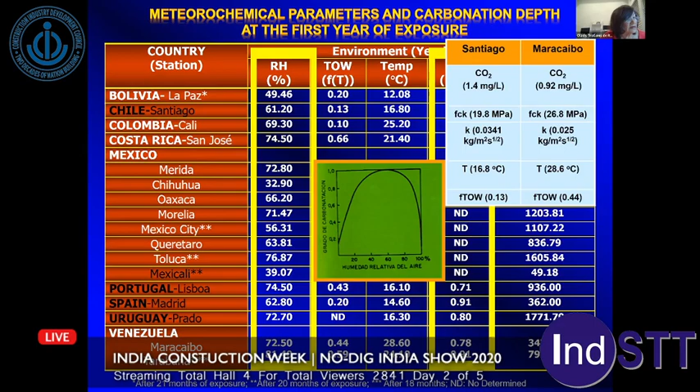We are processing all the data statistically. We use first a mathematical model, multiple linear regression, trying to find the effect of meteorochemical and electrochemical parameters on the corrosion rate.

From this, we made a linear multiple regression model, taking into consideration the water cement ratio, the exposure phase, the rebar cover thickness, the geographic location, and also without restriction. We found that the most important parameters were the exposure time, the capillary absorption, the alkaline reserve, the relative humidity, precipitation, and temperature. And those are some of the models that we found.

It is important to point out that if you take just the time into consideration, this is the correlation between the carbonation depth and the time, and the correlation coefficient is very low. But if you take into consideration the quality of the concrete, the correlation coefficient increases, and increases more if we also take into consideration the environment and the quality of the concrete.

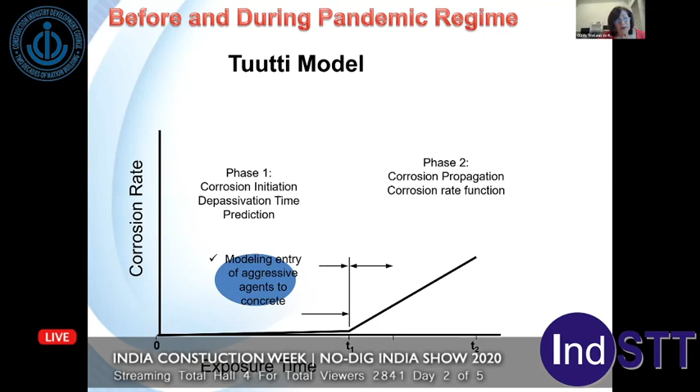Definitely the COVID situation has hit the whole globe, and Mexico is not the exception. We have had hard times in the industry completing projects, and all our jobs have been transformed into a new way to perform them. So I am glad to share this experience of finding our feet in challenging construction times, because we needed to change our point of view and our ways of work. I'm going to share one of the experiences in projects we have had in these times that fortunately have not stopped, because COVID has been an important issue worldwide, but job generation is also important.

So I'm going to talk about this adjustment that we have had, and also mention that the big projects in Mexico have not completely stopped. That doesn't mean life has gone on the same as before COVID, but big projects have continued with new health and safety rules recommended by physicians, the government, and the committed industry. Taking into account that construction jobs are mostly in open areas, it has been possible to continue some of these projects, reducing the amount of labor and taking advantage of technology to continue these project plans.

So I'm going to give a little talk about the new aquarium at the Cortes Sea in Mexico, and also mention the specialty concrete being used in this project that is being built at this very point. It's being built throughout 2020 and will be opened next year. That's at least the plan.

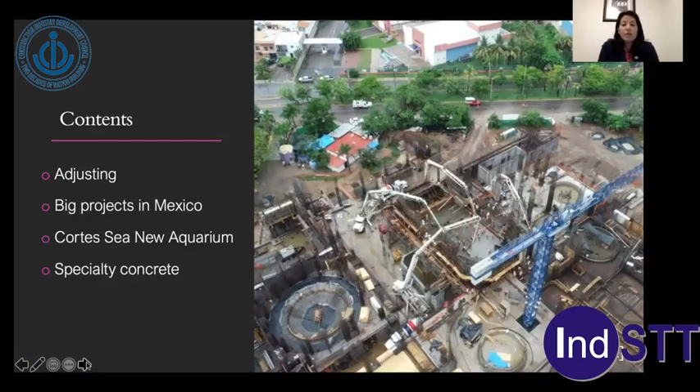We have here a beautiful aerial picture where we can see there is less labor than what we would normally have in Mexico. I know in some countries it would still be a lot of people there. However, in our country labor is not as expensive, so it's preferred by construction for a lot of jobs, and I'm sure in some parts of India it would be very similar. However, it's been reduced because of the situation with health care that we are having globally.

The Cortes Sea Aquarium is rated in the top 10 in the world because of its size and because of the importance of the amount of species that will be shown there. The opening, as I mentioned, is planned for 2021. The water capacity is about 5 million liters, and more than 12,000 square meters of built surface is planned.

So this is part of the complex, which will have other parks and other public areas for people, and the investment is from private industry in Mexico, and will also bring tourists to the area. So one of the technologies used there is a low permeability and non-structural crack self-healing admixture.

This is called by ACI 212 type PRAH. This means that whenever a crack is open, or porosity in the concrete is present, and there is some source of water, humidity, or moisture, this will combine into compounds together with the hydrated cement, and then it will form more CSH that will start blocking those cracks and porosity. So this will reduce the permeability. These are some tests we had in Mexico related to the self-healing capacity, of course for non-structural cracking.

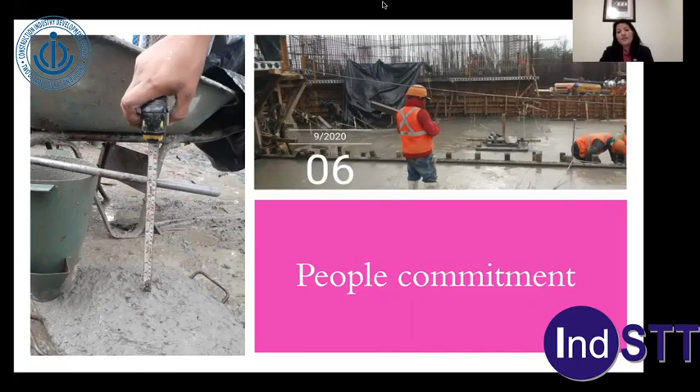Up above the world so high and down on the ground, the advancements you see in India's aviation are the success saga of the excellence shown by Airports Authority of India. AAI is constructing, operating and maintaining world-class airports. Along with that, AAI has a side that's down to earth and close to the people, clearly visible in its CSR programs and activities.

Through its CSR activities, AAI has keenly focused on skill development. To generate livelihood opportunities in backward and remote areas, AAI has tied up with the Construction Industry Development Council for skill development of unemployed youth and people belonging to economically weaker sections. In the construction industry, there is a huge shortage of skilled manpower, while at the same time there is unemployed youth. So if we provide them a skill, it will be a win-win situation for both.

Through this skill development training, students get theoretical and practical knowledge in construction-related subjects like land survey, electrical wireman, general work supervisor, site accountant, storekeeper, etc. We provide training to unskilled youth of India who are unemployed, distributing pamphlets at different locations in UP, Bihar, and West Bengal to find unskilled manpower and make them skilled through 3 months of training. More than 5,000 students have been trained under this skill development program since 2015.